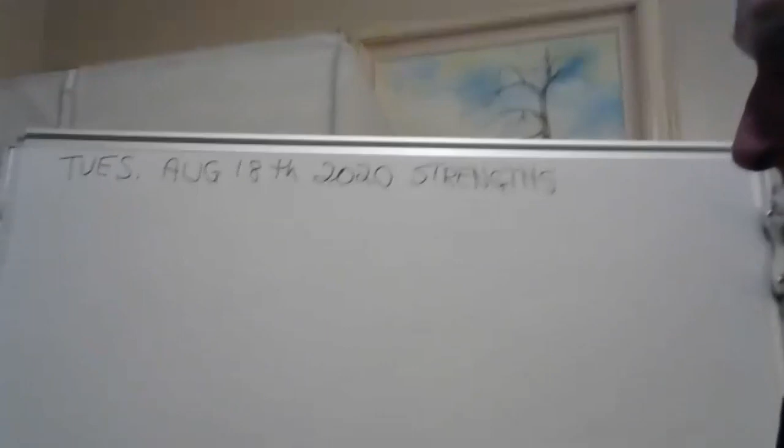Not too crazy about that camera angle. Hey, I think we've got somebody. Hey, there's Ben. There's another person. Let's see who we got here. We got Ben and Brian. Anybody else? I'm not too pleased with this. Hey, that's more like it. That's doable.

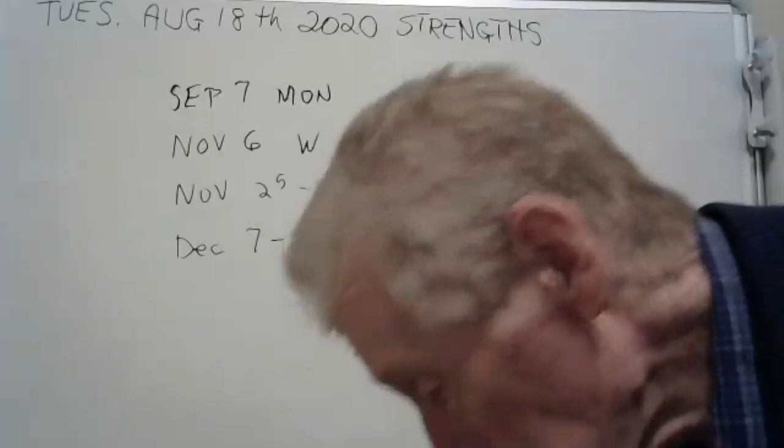Thanksgiving is November 25th through 29th. And finals are December 7th through 13th. You could look all that up in the calendar there under Blackboard. You didn't need me to do that. I just wanted to write some stuff on the board.

Okay, well, great. Well, so what? Well, I guess we could look at the syllabus a second. Let me see if there's anything important on that. I've got a copy here of the syllabus someplace.

Yeah, here it is. The book. Ta-da! That's the book, guys. It's by a guy named Hibbeler. It's the 10th edition. It tells about that in the syllabus.

Let's see what it says. I'm looking at the syllabus here, it's on Blackboard. And it says... oh gee, this is blank. This is the blank syllabus. I need the actual syllabus. Just a minute.

Okay, I think this is the real thing. No, that's another blank. All these are blank. I guess you're going to have to look it up on your Blackboard.

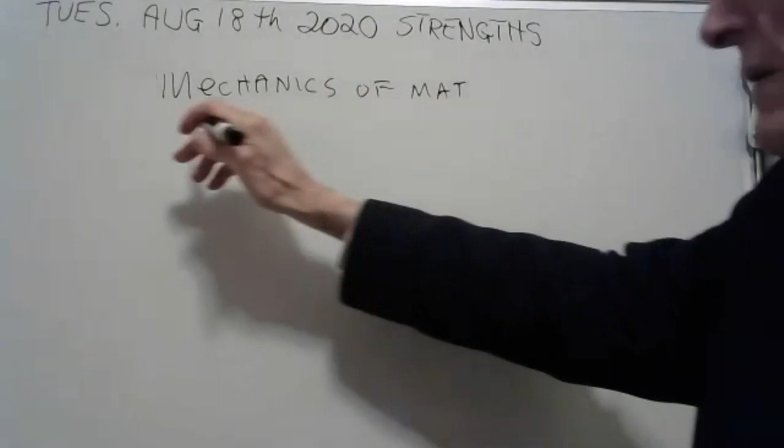The author is Hibbeler. The publisher is Pearson. And it's the 10th edition.

You can get that book through the TCC bookstore, through the publisher Pearson, or I bet through Amazon or Barnes and Noble. If I remember right, some places offer it as a rental. You can rent the book, it's real cheap. Just a thought, you could save money.

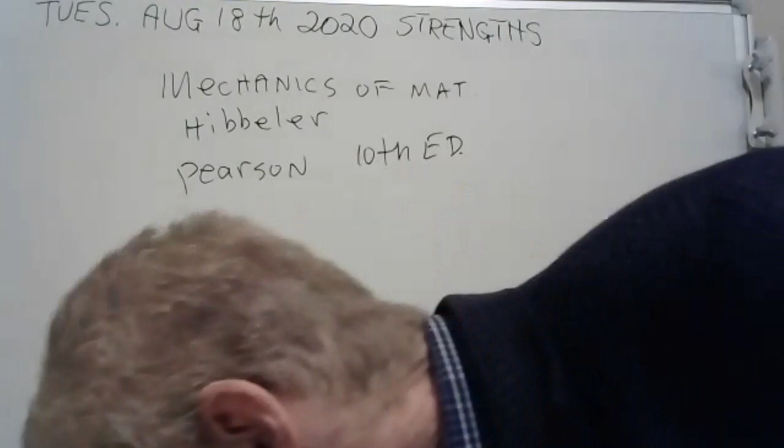You might be able to get the book also as an electronic book, that'll save you some money. So whether you get a new book, a used book, an electronic book, or rent the book, that's the book. I think on the syllabus it even has the ISBN number.

I could give it to you, but if it's on the syllabus you don't need it. I asked what that stood for, and somebody said it's the International Book Number. I think it's International Standard Book Number, I believe is what that stands for.

So that's the book. The syllabus tells you what the homework is, when it's due, and how to do the homework. And then the schedule tells you when the tests are and what homework is due.

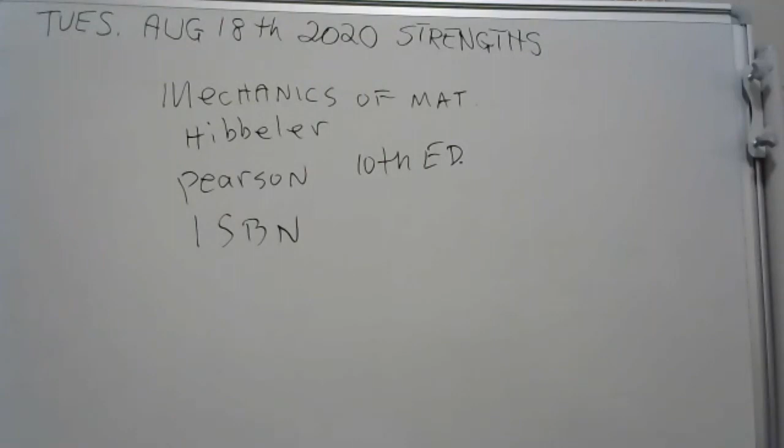Read them. Read the syllabus. Let's just write it down here: read the syllabus. And read the schedule.

Okay, any questions so far? Well, according to the schedule we're supposed to study chapter 1, so let's start studying it. And it says on the schedule that today, the 18th, we do a statics review.

So here, let's do a statics review. Here we go. Again, any last comments or questions before we start a statics review?

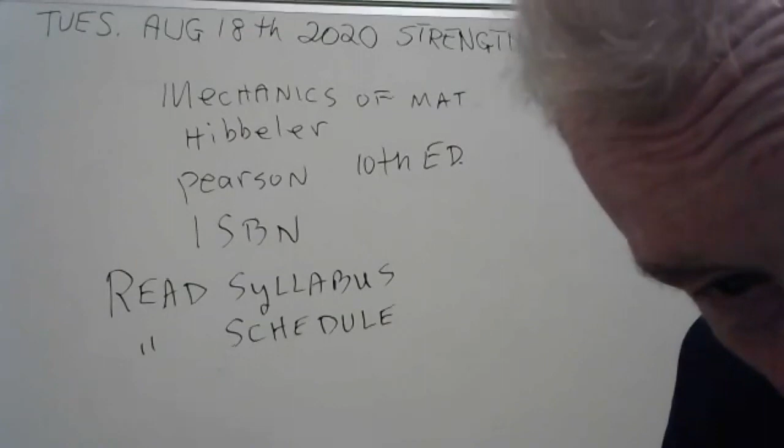Let me see who's on board here. Oh, we've got a good crowd. Look at this, we've got Alex and Nicholas, Julian, and Darren, Ben. I think some more here too. Let's see who else we have here. I don't know how to... there we go. We have Shane and Noah, Mohammed and Megan and Jackson and Hal. I remember some of you guys because I've had you before. And Damon and Brian, we got a great group.

Okay, any last comments or questions before we have a statics review? Now wait a minute, do I have everybody muted or what? Let me see, maybe I've got everybody muted. I don't know. It says unmute all, so I'll do that for right now. You're all unmuted. Anybody have anything to say? Anything to say?

Good morning. Hey, good morning. I heard that, how are you? I'm fine, thank you. Good, beautiful to be back in class. I didn't quite hear that last one. It's just good to be back in class. Yeah, isn't it great? It's good to be back. My audio is kind of weak, do you suppose there's a way I could turn up my volume? I don't know how to do that. Oh well, I can hear you.

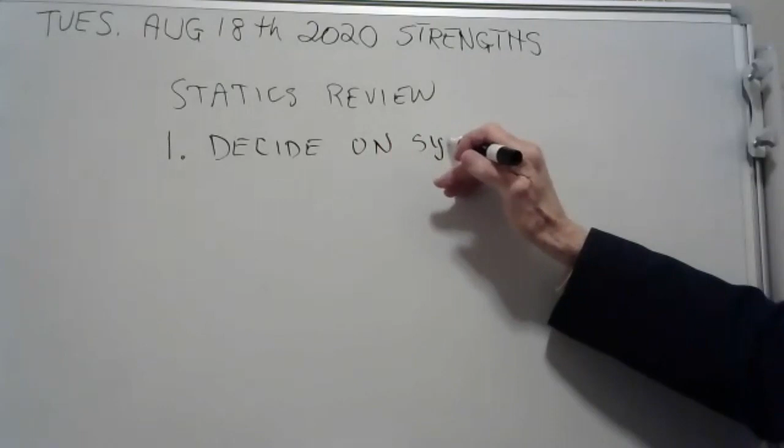All right, now I scribbled down some things here. When you solve a problem in this class, you have to decide on what your body is, or your system. You have to know what is part of the system you're studying and what isn't, and you don't want to get mixed up.

And then you want to make a sketch. You want to do a free body diagram, we call it. Let me write that out for you. They've called it that for years, it's kind of a weird name. But we'll do some free body diagrams, and then see what you do with that as you put your forces in there.

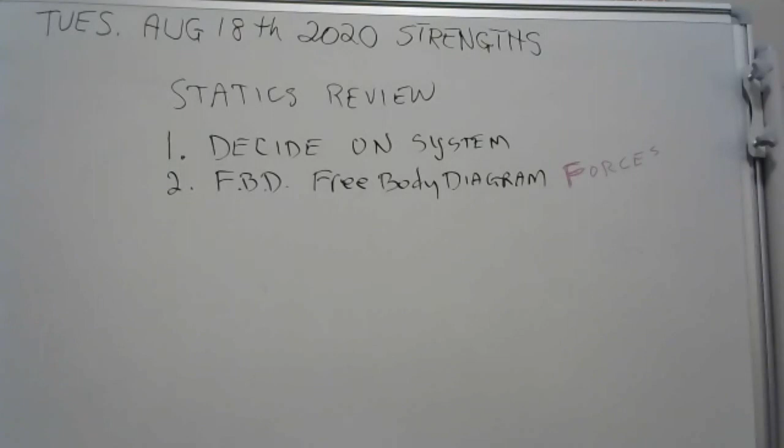Get yourself a red pencil or pen and put your forces in red. Does that come out red? Yeah, it kind of does. Put your forces in red. And where students can get mixed up is they'll put forces in, but they're not on the body, they're on maybe something else outside the body. That's why you have to decide what your body is. And when you do this, you want to do it to scale.

And you want to measure your angles. Measure stuff, see, get yourself a ruler. Ta-da! Get yourself a ruler so you can measure stuff. This has got metric and English. Get yourself a protractor. Ta-da! I got a protractor here. Measure your angles. Measure and do everything to scale. Okay.

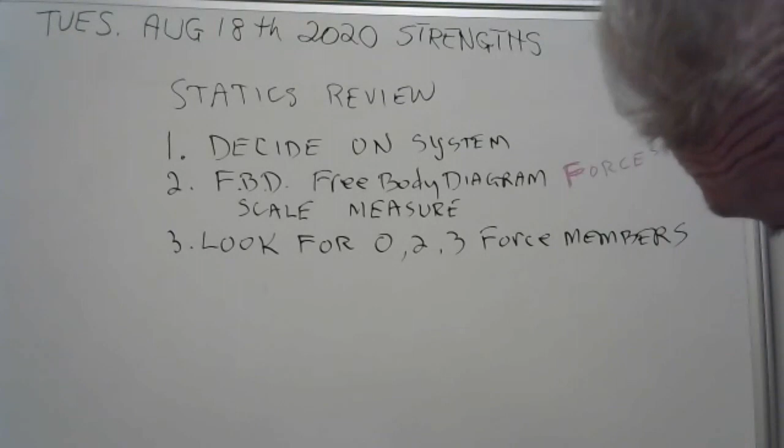And then the next thing you do is you look for zero, two, and three-force members. Maybe we can show you some examples of that later. Two-force members come in two types.

There's tension and compression. I'll draw you, if you have a tension member, I like my forces in red. Then it's being stretched, see, you have your forces going like this. That's a two-force member, it's only got two forces on it. Now if it's a compression member, then the forces are pushing like that. That's the two types of two-force members: tension and compression.

Hopefully I'm boring you because you already know all this stuff. This is compression.

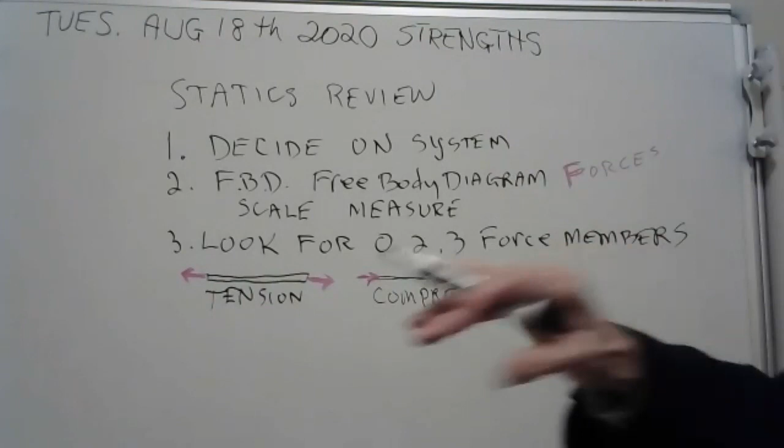Now, if you have a 0-force member, we'll show you one of those sometime. 3-force members come in 2 types: concurrent or parallel. Concurrent means that all of the forces go through a point. Parallel means that all the forces are parallel.

We'll show you an example of that. Okay, step number 4: you solve for all the external forces and moments. You might have moments, that's possible.

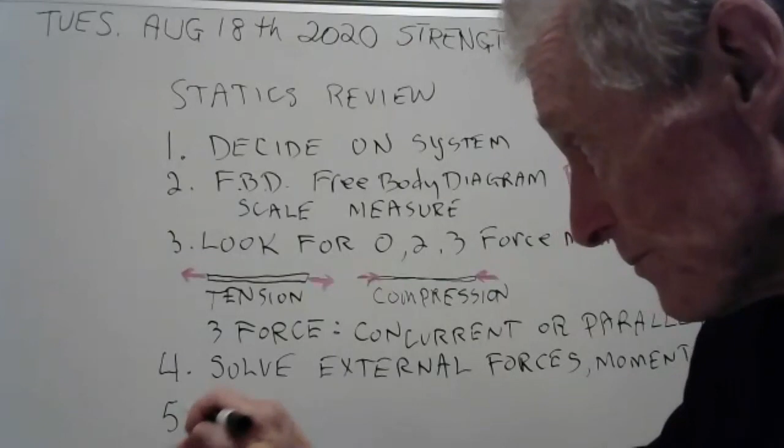Solve for them. And then step number 5, if they want you to find internal forces and moments, then you have to break it. By the way, you solve these using these equations right here. This is how you solve for the external forces and moments on your whole system now. We're just dealing with the whole system.

Well, I ran out of space, so I'm going to have to go to number 5 now. But here's a nice little checklist. Number 5: if they want you to find the internal forces and moments, we can call them internal loads. You could call these external loads. But to find the internal loads,

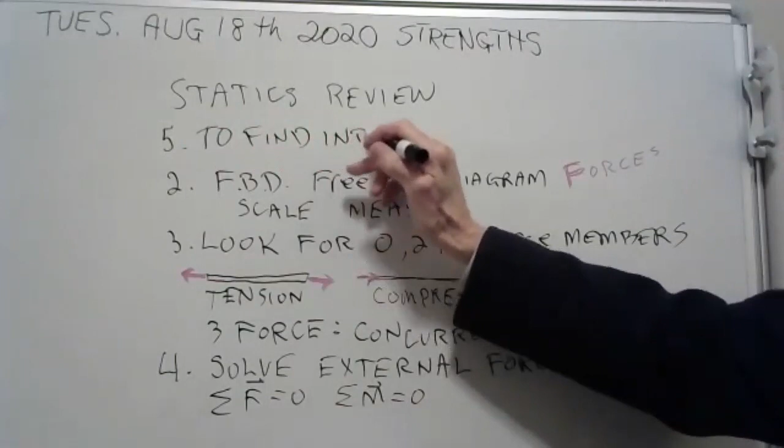you have to make sections. You're going to have to section this. And there's 3 ways to section a system. You can make pins, you can talk about pins, or you can talk about members. Pins, members, or sections, where you maybe cut the whole system in half or thirds or whatever.

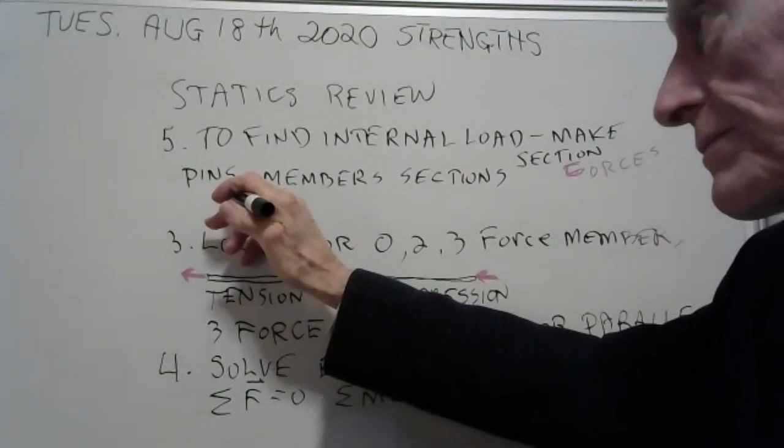And then once you decide on whether you're using pins, members, or sections, then guess what? To solve, you have to use these equations again, but you're going to use them this time on your chosen pins, members, or sections. You're going to do it on your parts. Instead of saying make a section, you have to break it into parts. If you want to find what's going on inside, if you want to find the internal loads, you have to break it into parts.

And then guess what you do after that? Well, I skipped something. Really, before you do that, you should look for 0, 2, and 3-force members on your parts that you broke it into. Then you solve for the forces that are acting and the moments that are acting on your parts.

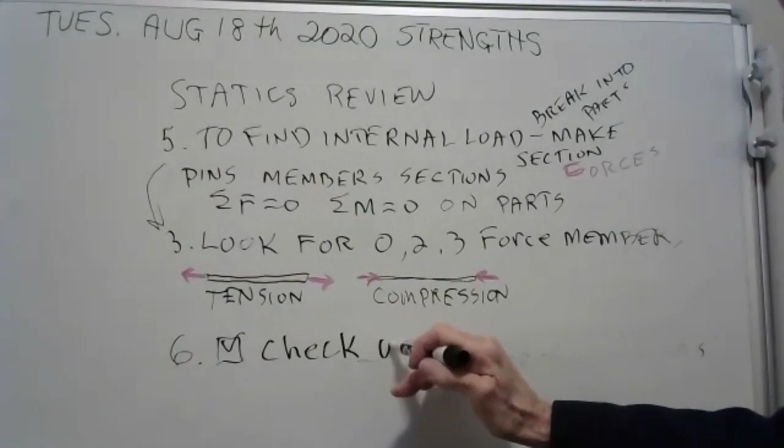Okay, and then finally, when you get all through with all that, the last step... I think we had step 5 there, maybe. The last step is you want to check your work. Now, there's several ways to do that, and I'll try to show you, and maybe you can remember how to do that.

One way is get a buddy and work with a friend, and the 2 of you together can find each other's mistakes that way. It's hard to find your own mistakes. Another way is you can look in the answer book if you're lucky enough to have one. Another way of checking your work is to look at the units. The units have to work. Check your work, check your answers, check your units.

There. Now we've just given you a statics review. Do you have any questions on the statics review?

Well, let me go back over to zero. Go ahead, get back over zero force members. Yeah, okay, I'll do a zero force member for you. Thank you for asking. Let me make a little room here.

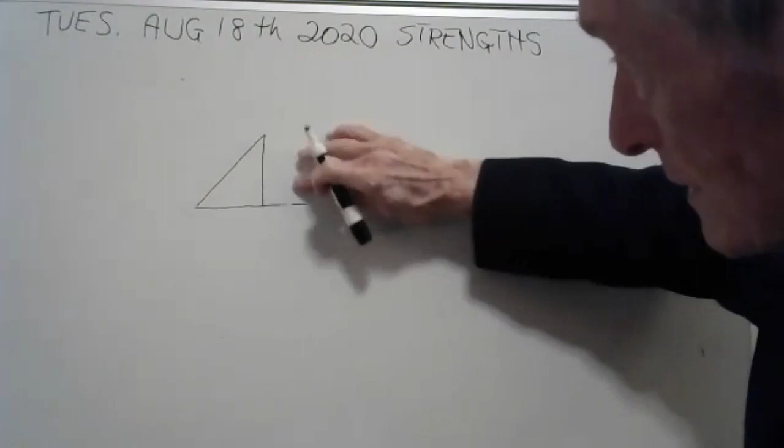Suppose you had a truss. And who am I talking to? Who asked me this question? Who is it? Jackson Wilson. Oh, Jackson. Good going, Jackson. Thank you for asking.

Jackson wants to know if you had a truss like that. Now you need some kind of external load. Why don't we put an external load right here, Jackson? There we go. Now you know there's got to be some external loading going on here. It kind of depends on the angles. I didn't draw those exactly equal, but it turns out, Jackson, that this member right in here is a zero force member.

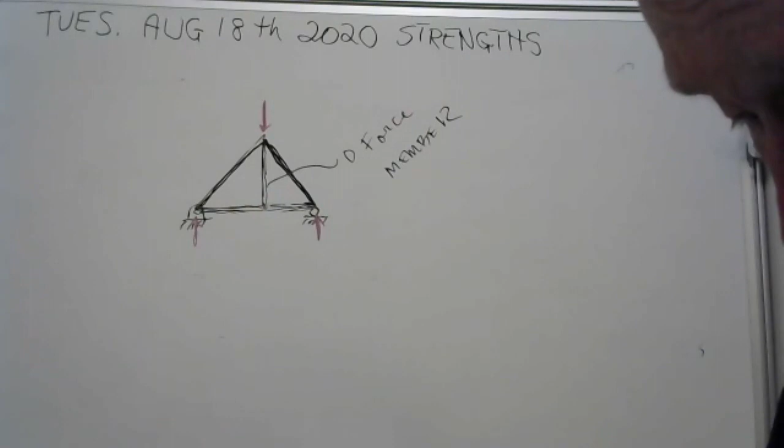Now the reason why is this is a truss, and trusses are composed entirely of two force members. That's what a truss is. It's a structure composed entirely, let me write that, a truss is composed entirely or only of two force members.

It's just that this one here, I don't know what to call it. Let's say this is A, B, C, D. BD is a two force member, but both forces are zero. You got zero, I don't know, kips maybe, and zero kips. It's not tension or compression. It's a two force member. It's just that both members are zero.

By the way, a kip is 1,000 pounds. I hope you know that. But if you don't, I'm glad you're tuned in, because that's what a kip is. It's a kilo pound. A kip is a kilo pound.

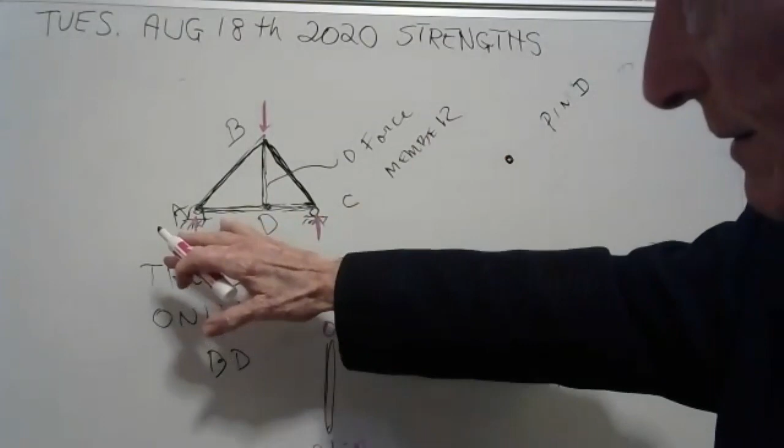Now here's the reason why. Do you see this pin D right here? This is pin D. We are looking at pin D. Well, it turns out that these bottom members are tension members. And so it has a tension member that's pulling on it, AD. There's AD. And it has a tension member, DC, pulling on it. And the other, they have to be equal. They have to be equal because that pin can't go anyplace.

Now, if this is a tension member, then that would be pulling on it. But you can't have just one force on that pin or it would move. In statics, nothing moves. That's what the word static means. It doesn't move. So there is no other force going down. I don't see any force going down here, do you? And so that force has to be zero.

That force has to be zero. And these forces here, these are not zero force members, but BD is a zero force member. Here, let me draw it for you. There's more room over here. Here's BD. Now we know that there's no force down here at D. Zero force at D. So you can't have a force at B. There's only two forces, and if that one's zero, then that one there has to be zero. Now there's forces all right in these members here. They're compressive forces.

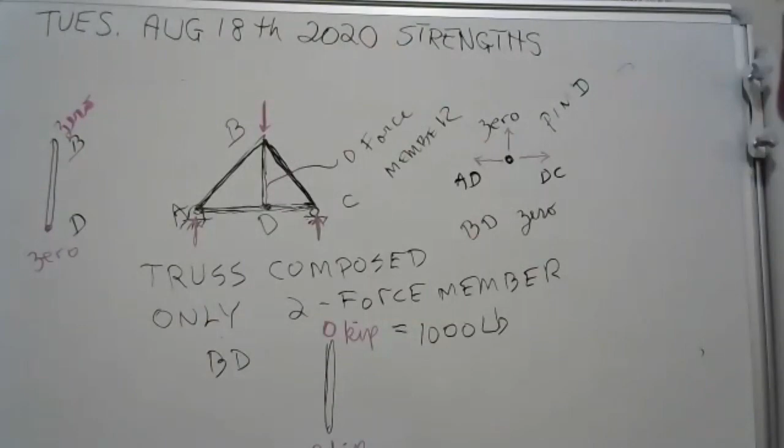Jackson, did I explain that where you understand it? Yeah. Are you saying yes just to be nice, or do you really understand it? Yeah, it's just been a while since I was last in statics, so. Good. Well, thank you for asking.

Now let's see, where was I? Oh yeah, I want to do a problem now. I want to do a problem to illustrate.

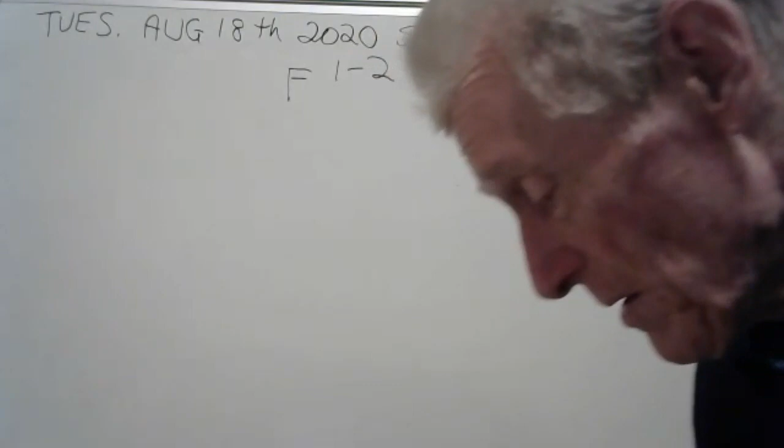I know you can. Okay, now the problem we're going to do together right now, I'm totally organized here, is it's on page 16. That's your homework. Well, this is on page 16 also. Let me find it here. Okay, this is F1-6. Okay, we're going to do this problem. That's your homework. Let me erase that. It's on Blackboard, but this is not on your homework. This is just for fun for us to do, to practice doing statics.

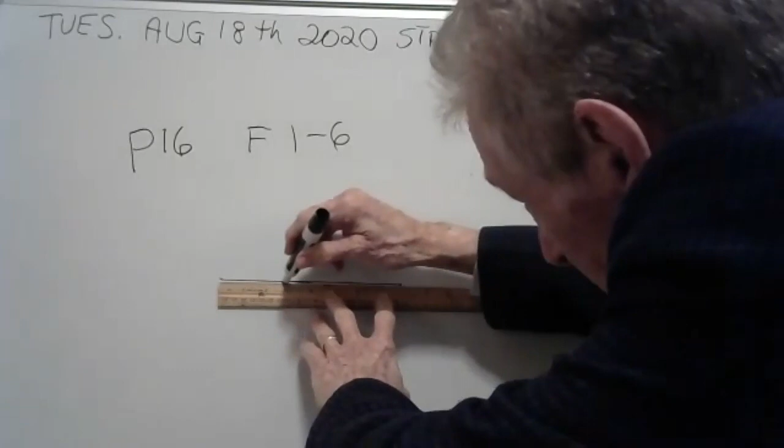And remember, I gave you step by step how to do statics problems. And the first thing you got to do is write your free body diagram to scale. So let me get my ruler out. And I need to have a 3, 4, 5 triangle here. I wonder if I could do inches. I don't see why not. Let's have inches. Yeah, guys, wouldn't it be better to have a scale of 8 inches though? Yeah, that's what we'll do. So we'll have that 8, and this will be 3. Well, that'd be 6. Yeah, there we go. Yeah, we're doing this to scale.

And then we got this here. Let me make some room here. This is problem F1-6 in your book. And how long is this thing? Well, it's 6. So that'd really be 12, wouldn't it? Man, I don't know. I don't know if I got enough room for all this. Yeah, we'll make it.

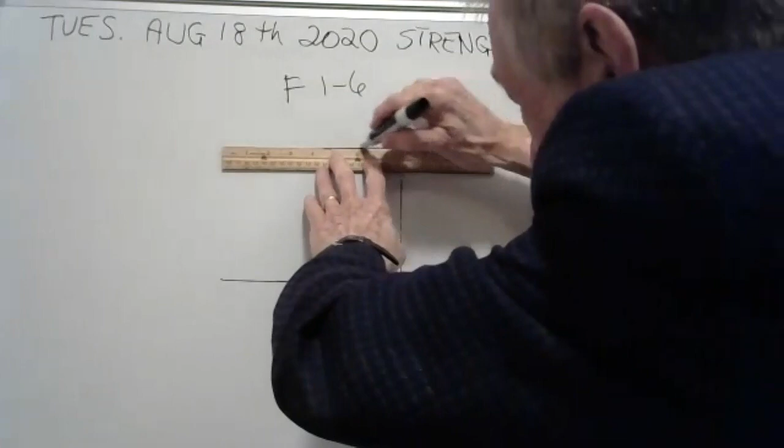I'm trying to do this to scale. How far is it now? It should be 8. Yeah. There we go.

All right, let me draw this thing here. I've tried to draw this thing to scale, this way I know how. And there's a distributed load on it. Now how big is this distributed load, is the question.

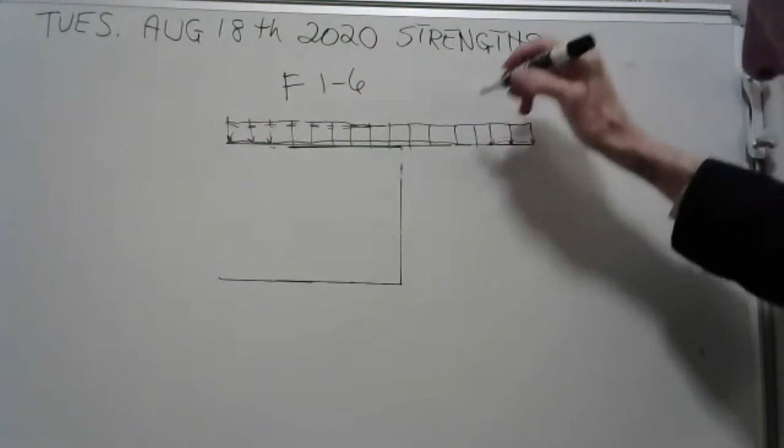Well, sorry, it's messy there. Yeah, it's 5 kilonewtons per meter. Okay, and now this, did I make that 8? Yes, did I make that 8? Yeah, pretty good, pretty good.

Yeah, let's try to draw this thing. It's a bent rod, you know it? It's a bent rod. Yeah, there we go.

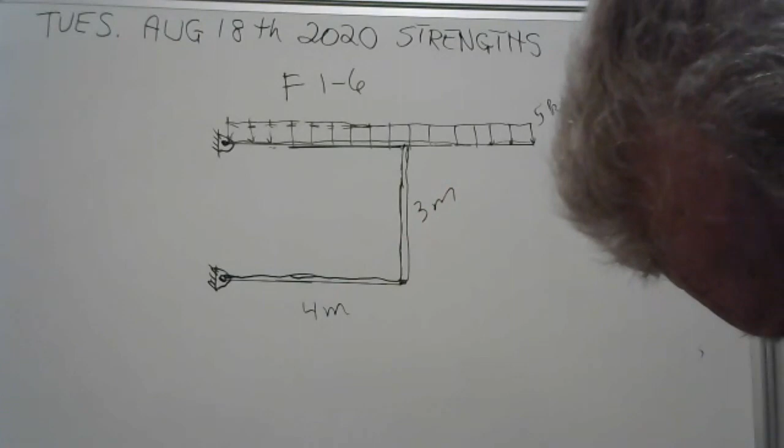This is 4 meters, 3 meters, and that's 6 meters across the top. So that makes that 4 meters, that makes that 2 meters, doesn't it?

Should be 4 inches on my scale. Wait a minute, I think I goofed up. If that's 4 meters, this should be 8. 4 meters 8, this should be 6. And this should be, well, it's supposed to be 12, right? Yeah, yeah, I made this too big.

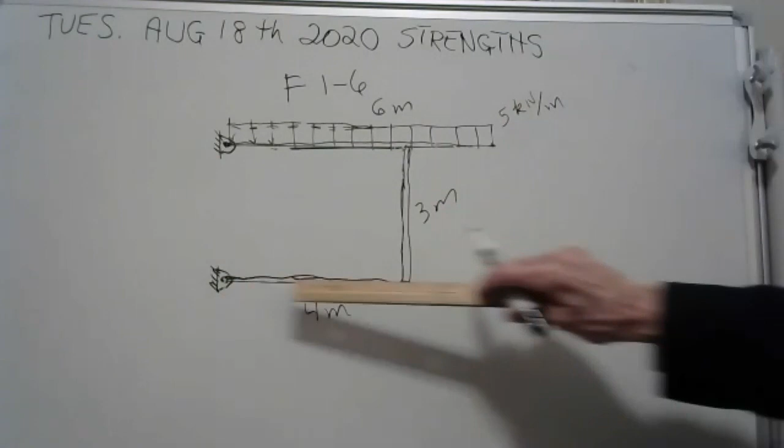That's okay, this should be 4, and it is. Now you're supposed to do your homework. If you read the syllabus, you're supposed to do your homework on engineering paper. And if you have engineering paper, it has a grid, and you can make these angles right, and you can measure these and get them to scale.

Look, I did this to scale. See, this is 4 meters, and this is 2 meters. I did it to scale, didn't I?

Okay, let's label all this stuff. This is A. Now, they want us, for some reason, to label a place in here called C. All right, we'll do that. And this is B. There's B. And this is D. There, we labeled all that stuff.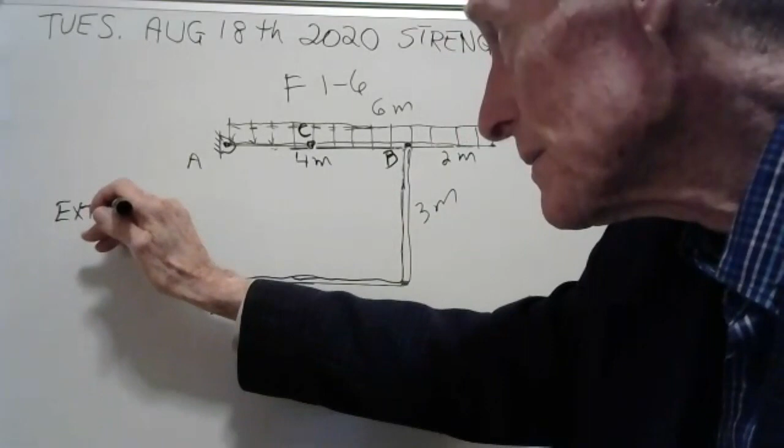Now, what do they want to know? They want to know the internal forces at C. You guys need to understand that there's external forces and there are internal forces.

And when we study stress, stress is always based on the internal forces. And we'll find the stress. Do they want to find the stress? No, all they want to find is the forces. But we'll soon be talking about stress.

You see, there's normal stress, and what that is is normal force over area. And there's shear stress, which is shear force over area. But normal force and shear force are internal forces.

Okay, well, now our first job is to figure out all the external forces. Okay, well, here goes. We are going to write this distributed load. What is it? 6 meters? 6 times 5 is 30. So we're going to put that right in the middle.

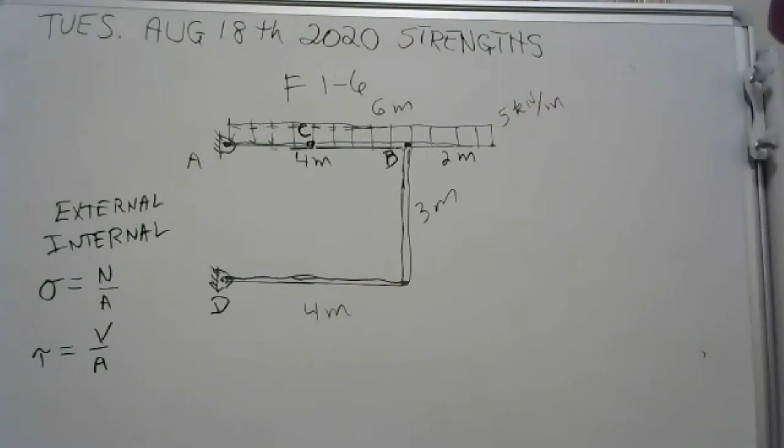Well, what's the middle of it? The very middle, according to my scale, would be right here. And this is the resultant force of that distributed load, and it's 6 times 5, it's 30 kilonewtons. That's your external force there.

And we need to find out what the forces are at A and D. That's what we need to find out. We don't know what they are.

But it did say to look for 0, 2, and 3 force members. Do you ever wonder why we don't look for 1 force members? Because you can't have a 1 force member in statics. Now, our course is called Strength of Materials, but it's still statics. If you have a body with only 1 force on it, that body is going to move, and it's not going to be in our course. We're still in statics, really.

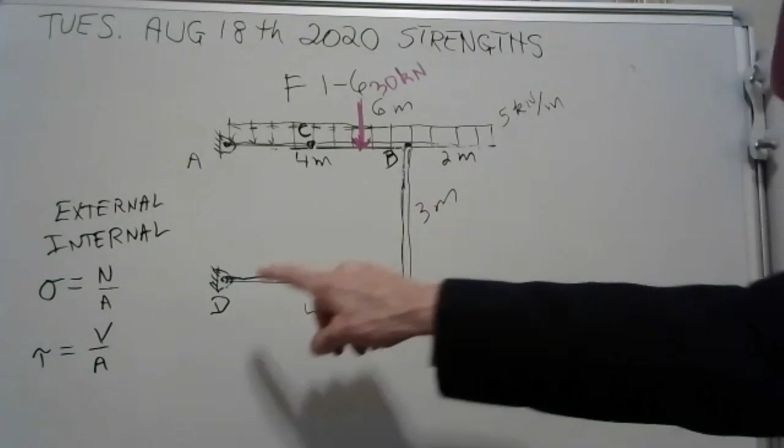But it turns out that this crooked member BD is a 2-force member. It may not look like a 2-force member, but I'll tell you what, it's only got a smooth pin at D and a smooth pin at B. So it's going to have a force that does this.

Because remember, there's only 2 kinds of 2-force members, compression and tension. And this one's going to be compression. I should make that red, though, I like my forces in red. Hey, we just found out the direction of this force at D. Let's call it D, would be a nice name for it.

Okay, great. Now, if you drew this bent member here, there would be a compressive force on it in line with that force at D.

Now let's look at A. Can you tell that at A, it's got to have a force going to the left, because this has a force going to the right, but it also might have a vertical force. I don't know. We don't know yet. It might have a force going up. We don't know the amount of this force D or either of those forces at A.

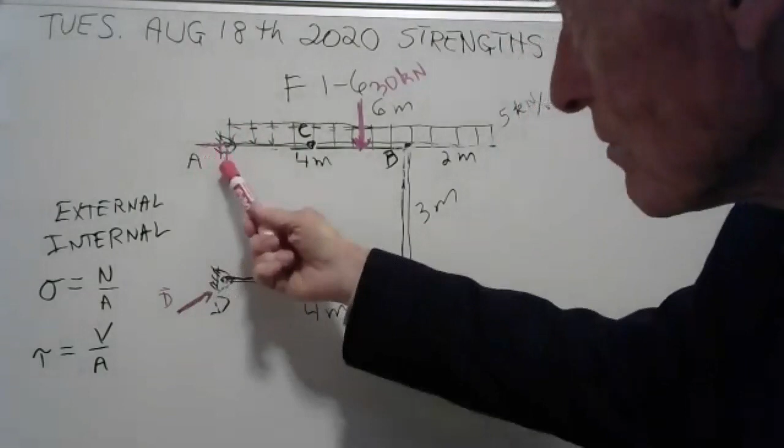We could give them names. We could call this AX, and we could call that AY. That'd be okay.

If anybody just tuned in, what we're doing is reviewing some statics. We're doing problem F1-6, on page 16 in your book. We've tried to draw the free body diagram to scale. You're supposed to do it on engineering paper. And the syllabus says to write out the problem exactly as it's expressed in the book. They say, determine the resultant internal normal force, shear force, and bending moment at point C in the beam. Well, we'll do that.

And we'll follow the step-by-step methods of statics that I tried to show you earlier. And we will put this on YouTube. You could watch this over again if you didn't get it the first time.

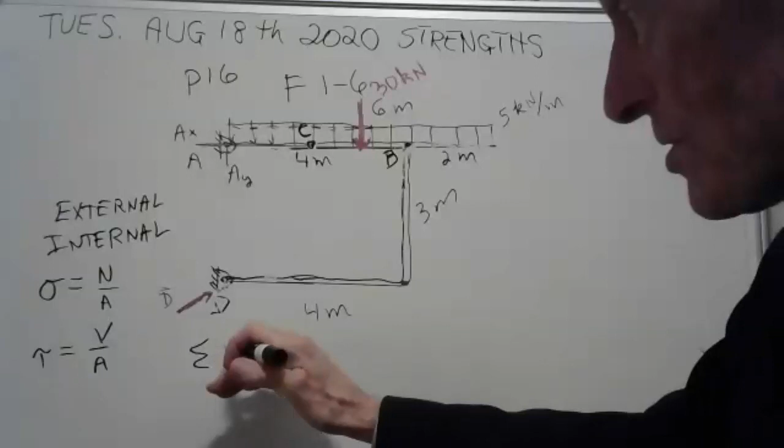But now how do you find these external forces? Well, according to our step-by-step method, you use these equations. You go the sum of the forces and the sum of the moments. Let's do the sum of the moments, and you have to pick a point. Always pick the point where you know the least. I don't know what either of those are, so I'm just going to say the sum of the moments about point A.

It's going to be negative 30 kilonewtons times, I'm going to have to think about this. I think it's 6 meters from here to here. See, it's 4 meters from here to here, but no, wait a minute. No, that would be 3 meters, wouldn't it? Yeah. See, on my scale, that's 6 inches, so that's 3 meters.

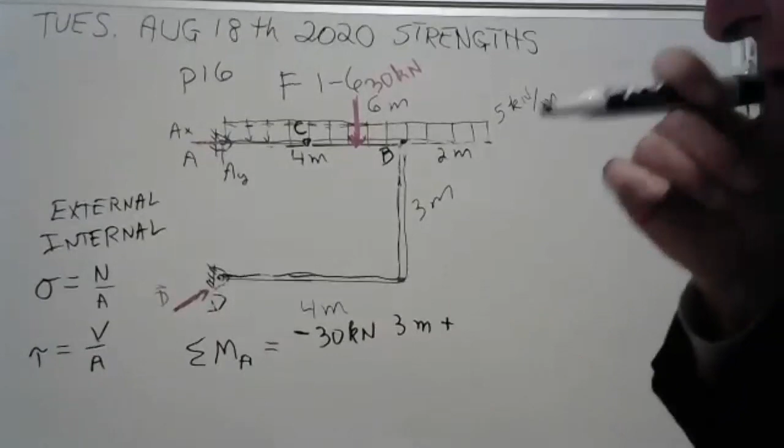Okay, and then you have a positive. Well, that has components, that's the problem. Let me draw the components. At D, you have a dy going up and a dx, that's the component in the x going to the right. So you have a positive dx times this 3 meters. And that's equal to 0 because the sum of the moments has to be 0 in statics.

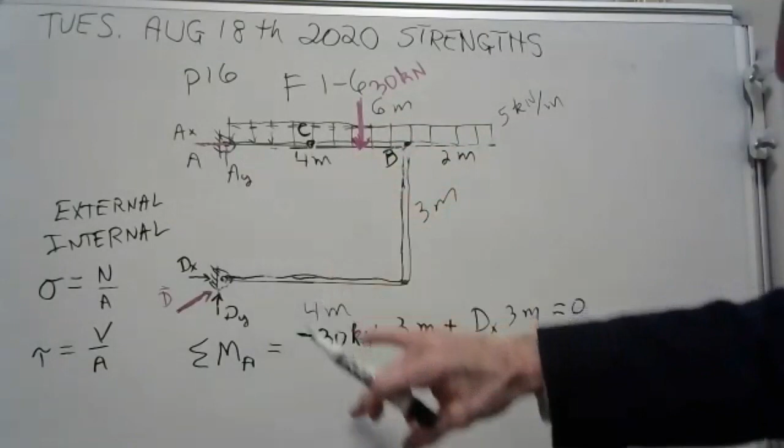I want to know how come that's a minus though. Let me ask one of my wonderful students here, see if they know. We have a lot of wonderful students here, and I'm going to pick on Shane. If you can unmute Shane and tell me how come this moment here, this 30 kilonewtons going down at 3 meters across is negative. Shane, how come that's negative? Unmute. Shane's not going to tell me. I'm going to unmute all. Somebody tell me, how come that's negative?

Because it's going clockwise in that direction. Positive, because of what? It's clockwise in relation to the point. That's the answer. See, about this point A, this would make you spin clockwise. Clockwise is negative, counterclockwise is positive. That's how come this one's positive. Because this dx tries to spin you counterclockwise about point A.

I actually have a question about that second member. Yeah, go ahead. Why is it dx instead of dy? Well, the x direction is this way, and the y direction is this way. And what I'm saying, tell me your name. Darren. What I'm saying, Darren, is that this force D here has an x component going to the right, a y component going up. And what is your question, Darren?

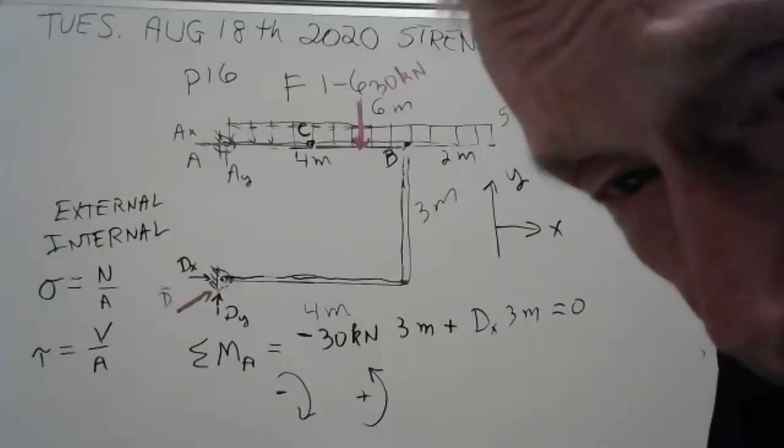I didn't understand the question. Why is it the x component of the force at D instead of the y component of the force at D? Oh, thank you for asking, Darren. This y component goes through point A. Can you see that, Darren? And a force that goes through the point doesn't give a moment. That's right, I'm sorry, it's been a while since I've had statics.

That's why we're doing this. Good question. Okay, well, I like this equation. I can solve this. In fact, I should be able to do that in my head. I'm getting 30. You guys getting 30? We just figured out this dx, it's 30 kilonewtons.

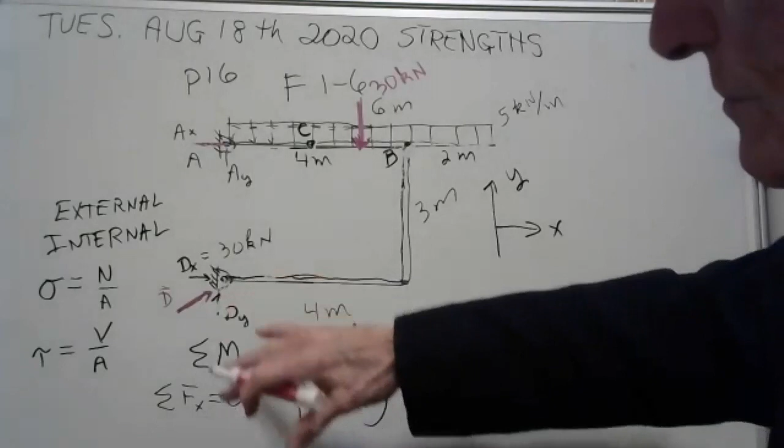Now we're going to do this equation here. The sum of the forces in the x has got to be 0. Well, there's only two forces here in the x. You've got 30 going to the right, so this 30 here is going to the left. I really like my external forces in red, so I'm going to put these components in black.

But what we have here is the x component is 30 kilonewtons. Isn't that nice? So now we know that, because the sum of the forces has to be 0. There's only two forces, one going to the right, one going to the left. They're both 30. And now we can get this force dy.

See what we're doing right now is we are getting the external forces on our structure. I need this dy. Okay, well, let me do that. I need to make a little room here.

Now, the sum of the forces in the y, we know has to be 0. This is one of the equations of equilibrium. There are two conditions for equilibrium. There's that one, and there's that one.

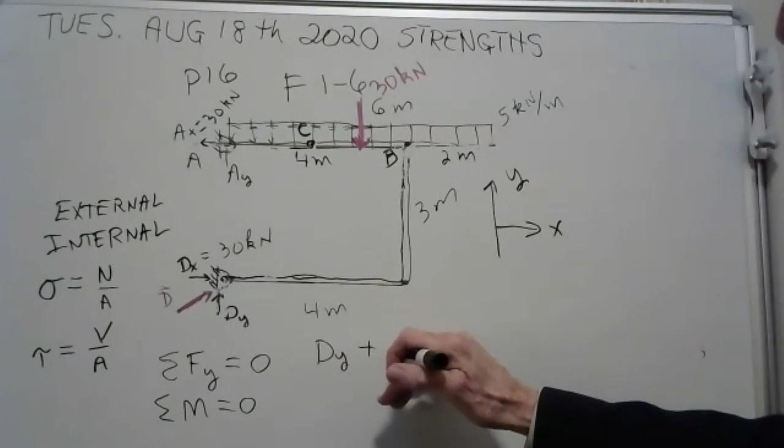Okay, well, let's do the forces in the y. Well, in the y, we have dy, and we have ay. Now, wait a minute. I don't know what ay is, do I? Well, never mind.

Okay, I don't know what ay is. Well, let me show you this. We know this angle here. This is a 3, 4, 5 triangle. If you drew this, that would be 5 meters. It's a 3, 4, 5 triangle. And if you take the arctangent of, now it'd be the arc sine of 3 over 5, you'll get 36.87.

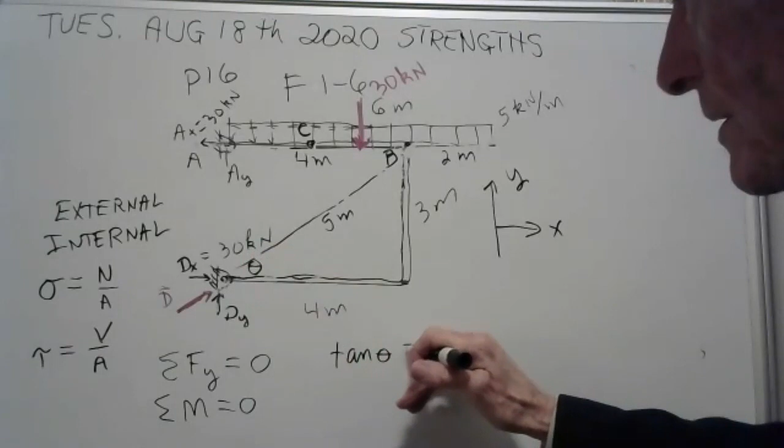I'm getting rusty now. Here, let me just do it on my calculator. What I'm doing is, or you could use a tangent. Call this angle theta. That angle theta is equal to 3 over 4, it's the opposite over the adjacent. Now, if you do that, what you get, this angle here is 36.87.

So what do we know? We know dx is 30. So d cosine of 36.87 is 30. And we can get d. And then we can get dy, and that'll be very helpful.

Did I lose anybody on that? Gosh, this is coming out underneath the board here. I need to write this up higher, sorry. Let me write it over here. D cosine of 36.87 is 30. Okay.

Well, we can solve for the d then. Here goes. D would be 30 divided by that. Okay, I can do that. I'm getting 37.5 kilonewtons. We just figured out what D is. D is 37.5

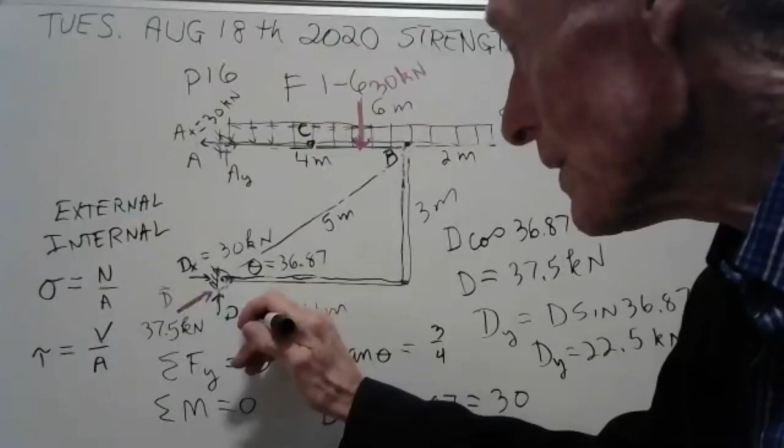kilonewtons. We think that this dy is 22. Unless I made a mistake, and if I have, I need you guys to tell me, but I think that dy is 22.5.

Now we can take the sum of the forces on the whole body. Here we go. I need some room here. Sum of the forces on the whole body are dy, which is 22.5, ay, which we don't know, and minus 30 kilonewtons. There's only three forces in the vertical, we're doing the y direction here. We got 22.5 going up, ay going up, and 30 going down. So we're going to solve for ay.

Well, I can almost do that in my head. Is it 7.5? Yeah. Okay, we think ay is 7.5 kilonewtons.

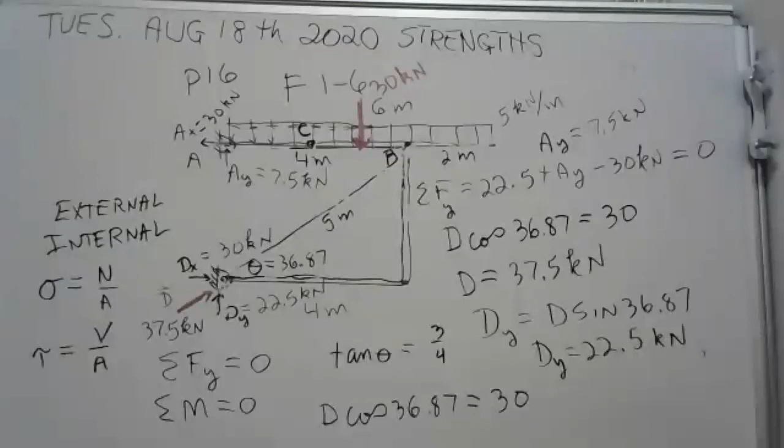I'll draw you a little angle here. You got, what I'm doing, I'm checking before I break it into parts. I've got 30 kilonewtons going to the left here at A, Point A. And I have 7.5 kilonewtons going up.

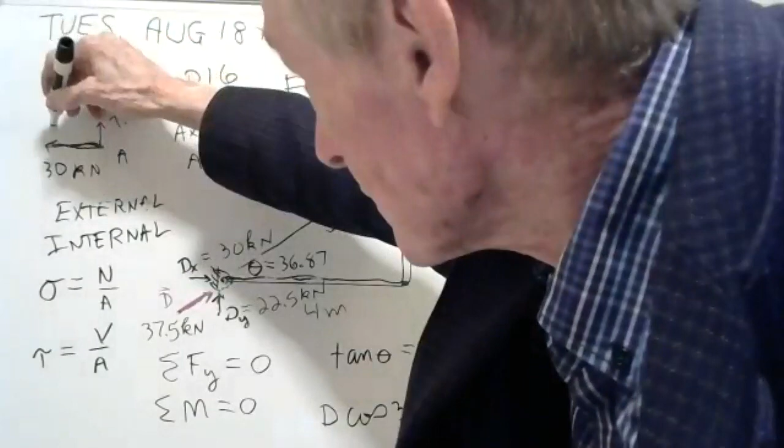So I can draw you that angle there. If you take the arc tangent of 7.5 over 30, I'm checking my work here. I'm making sure this is right. I hate it when I give you guys the wrong stuff. I'm getting 14 degrees. This vector at A is at 14 degrees, if I did that right.

Okay. Well, let's draw it. I'm going to make a 14-degree right here. Yeah, there's my protractor. 14 degrees is right, little bit messy there. Yeah, okay. 14 degrees, this puts me right about there.

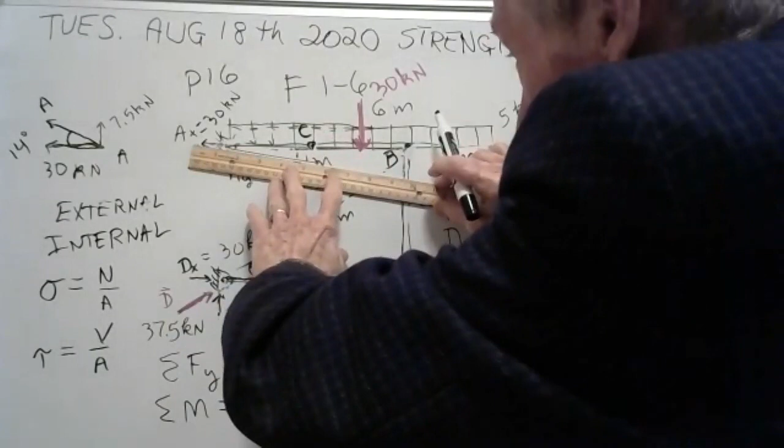14 puts me there. You see that 14 degrees? That's what we're talking about. There's 14 degrees there at A.

I don't really like it because all these are supposed to be concurrent. This angle is supposed to go, they're supposed to meet. They don't. So I must have made a mistake someplace. Let me go back over stuff here and see if I've fouled up.

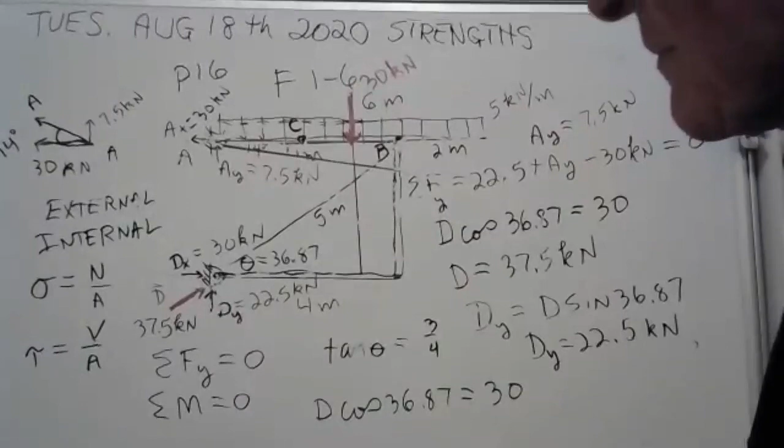I think I got this angle okay. Yeah, I think that's all right. That angle's okay. Yeah, I think I drew it kind of crudely there. Yeah, that's looking a little better. See, these are all supposed to meet. Is that 14 degrees? Let me double check that.

No, that's more like about 12 or 13. It's a little bit more than that. You know, I'm beginning to think we got this right, guys. It's a tad more than that.

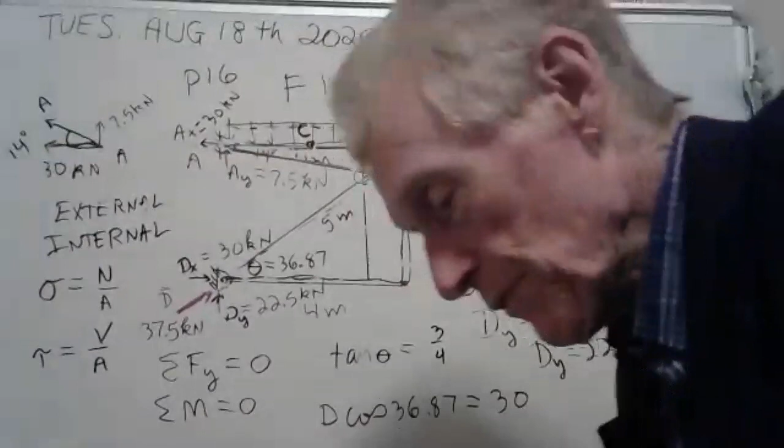See, these angles are all supposed to meet in a point. If you have a three-force structure, all the forces have to meet in a point. I should make that vector at A in red. It's more like this. There's A.

And I can tell you how big it is. It's 7.5 squared. Does that show up? Not very good. How about over here? Yeah. A is 7.5 squared plus 30 squared, square root. Let me try that and see what that is. 7.5 squared plus 30 squared, square root. It's 30.92 kilonewtons.

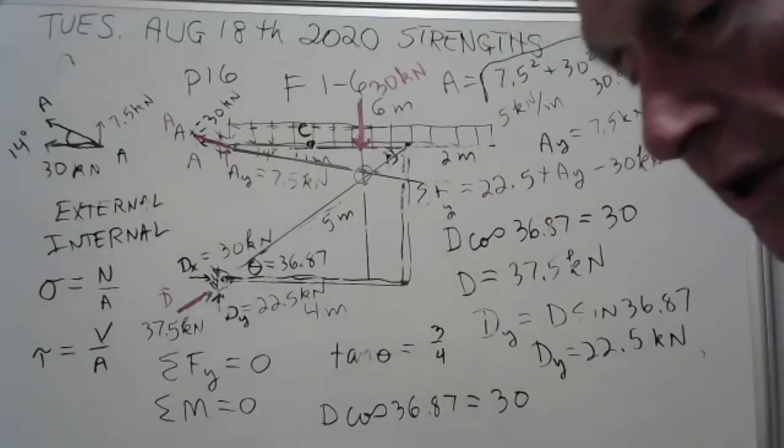Pretty dang close, guys. Well, let's solve this and see how we did. This is how you do these problems. Now, it's possible I might have put in a wrong number someplace. That's why I need you guys to double check this stuff.

But in order to find out what's happening at C, you have to take a section. So let's see if I can draw that. Do I have room here? Let's try this. This is really a hard problem. I shouldn't have picked this one. I should have picked an easier one, huh?

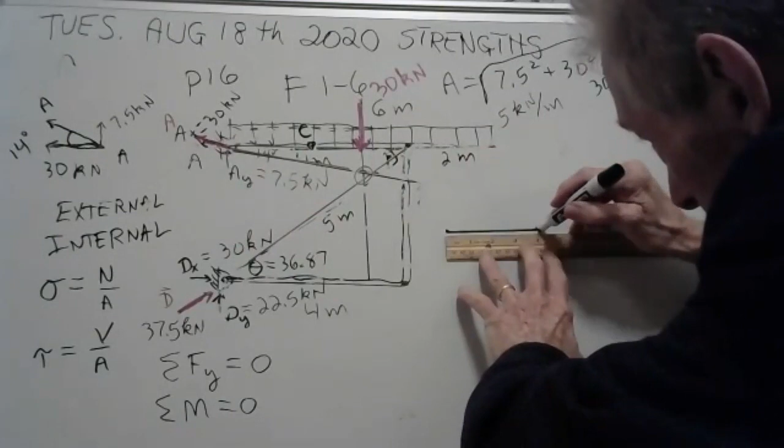But what we got here is, now how long is that? Well, that's 2 meters, right? So that's 4 inches on my scale. Now here's the thing, if you guys do this, get sharp pencils and have graph paper, you can get it to come out right on the money. It won't be crude like mine is, but I'm doing the best I know how.

This is C right here, and this is A. And if I did that A right, that's 30.92 at 14 degrees. So I can put that on here. Let me do that. Let's see. 14 degrees. It's a little bit crude. Yeah, it's right about there, I think.

And here's there's A. Now we're looking at this section here, and you have a partial distributed load here. This is 2 meters. This is 5 kilonewtons per meter. So that makes that 10. So you have 10 kilonewtons there, and A should be in red.

A is 30.92 kilonewtons. I need to make this 10 much smaller. You know, 10 is smaller than 30.92.

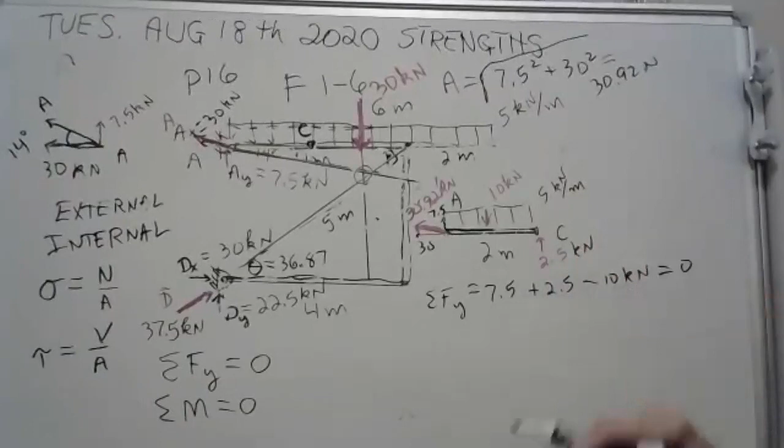7.5 going up, 30 going to the left. So when you take the sum of the forces in the Y on this section, you got 7.5 going up, 10 going down. You know what? I think you have to have 2.5. 7.5 going up, 2.5 kilonewtons going up, minus 10 kilonewtons going down equals 0. We've just figured out the shear force.

There are 4 kinds of internal loads. Let me write them for you. How are we doing on time? We're doing okay.

I wonder if any of you guys know what those are. We got a wonderful class here, and you've all had statics. Let me ask one of you guys. How about Samuel? Samuel, do you remember any of the 4 different kinds of internal loads?

The normal. Yeah, good going, Samuel. The normal, the shear force, and the moment. Very good, the normal force. Samuel knows the shear force. Samuel, they call it the bending moment. Okay.

And there's one more, Samuel. What's the last one? I don't remember that one. That's fine, that's fine. It's called torque. Proud of you. Thanks.

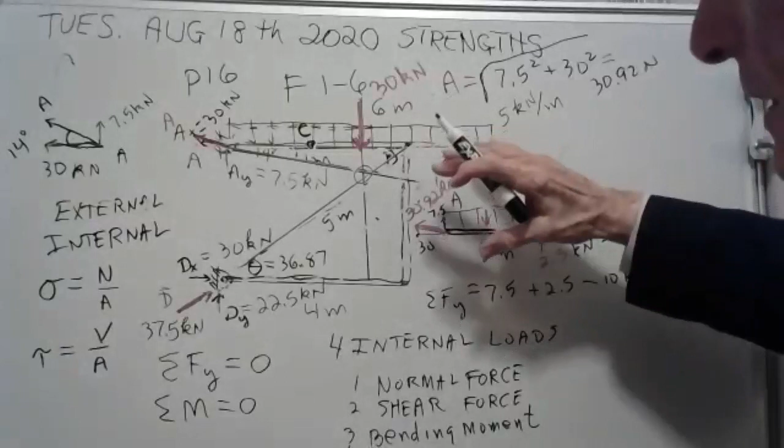There is no torque, so you guys can forget about torque. Torque, I don't know, torque is when you twist, okay? There's nothing twisting any of these members, so we don't have any torque to worry about.

And we just figured out the shear force. It's 2.5 kilonewtons. Now it's going up.

We figured that out, and now for the normal force. Well, can you see that if you got 30 going to the left, then you have to have 30 kilonewtons going to the right. Sum of the forces is 0 on this. So the normal force is 30 kilonewtons. It's tension, it's under tension.

Now, we haven't done the bending moment yet, but I'm just curious. Let's look at the answer book and see how we're doing on the answers. Guys, what we have just done is problem F1-6. This is a fundamental problem, and the beauty is they do these for you. Isn't that nice? So we could just look back here and see how to do it. Let me see if I can find it. F1-6, here we go.

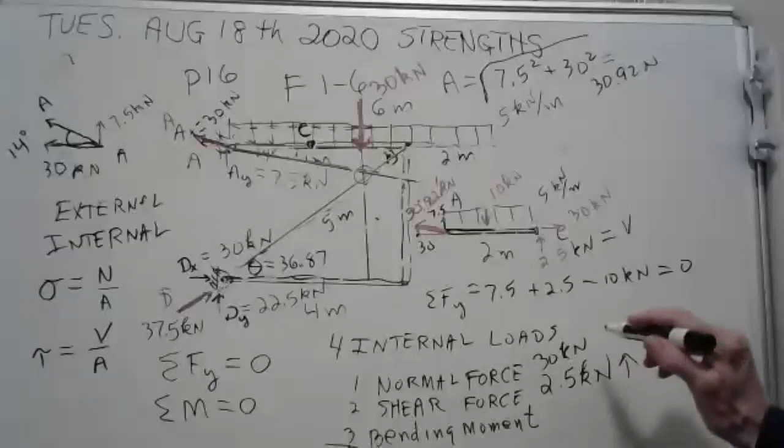Trying to find it. There's an answer book in the back, and it says F1-6. It says the normal force is 30 kilonewtons. Yay! Put a little happy face on that. We got the normal force at C. We did good. Now it says the shear force, got lost there.

The shear force, now they say that the shear force is -2.5 kilonewtons. Now we got, hey, I'm going to put a happy face on that too. We got 2.5 kilonewtons. But now wait a minute, they say it's negative. Well, you need to understand something.

I need a little room to show this. Let me write it over here. They made an agreement that if shear is going down on a left-hand member, it's considered positive. This is called positive shear.

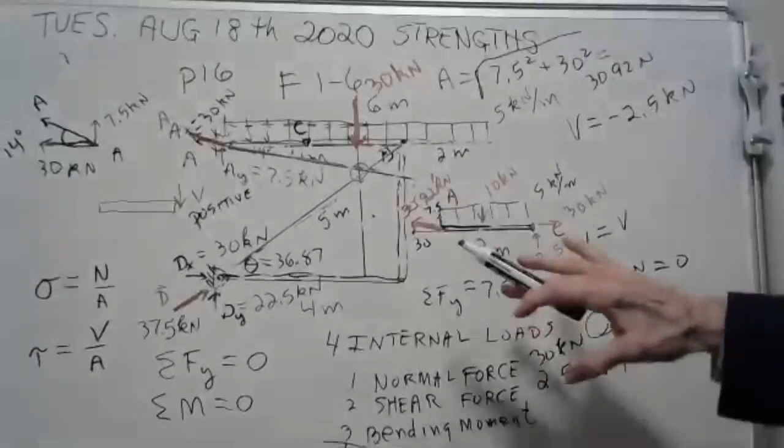But see, our shear, look, our shear is going up. See it? So that's how come the answer book says the shear is negative. Yay, we got it right.

Now the reason we got it right is we followed step by step. We drew the free body diagram to scale. We measured our angles. We did our equations of equilibrium. And we did not screw up, I don't think. Now, here's the final check.

We're going to do the bending moment. See, we're checking our work now. Well, we haven't got the bending moment yet.

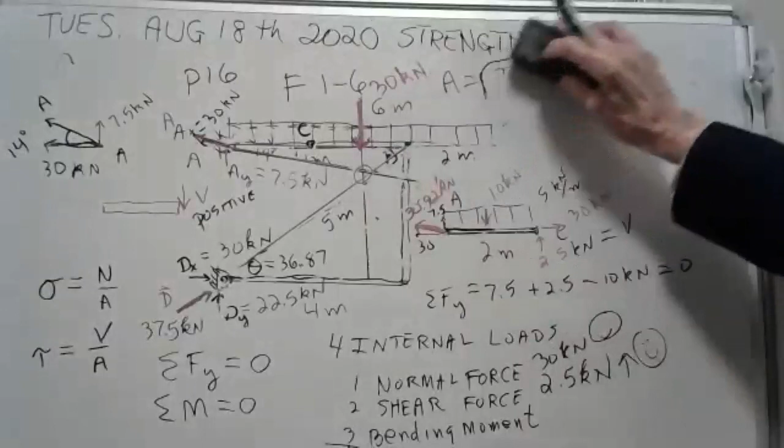Well, here's the equation. It's kind of in the bottom of the page there. I need some room. There's a bunch of room up here, let's use this. We all know this is August the 18th of 2020. We don't need any of that jazz. We know it's problem F1-6.

Now what we're going to do is we're going to take the sum of the moments, but we're going to do it on our section, see? This is our little section here, there it is. And why don't we do it about this point here? That is point A. Okay, hey, look, you see that 30.92 that has the components? That doesn't give you a moment about A. That force right there does not give you a moment about A.

Say that again, Noah. Or it's in the, let's see, hold on. This force right here, Noah, that goes through point A does not give you a moment about point A. Why is that? Because it goes through the force point. That's it. Yeah, it goes through the point.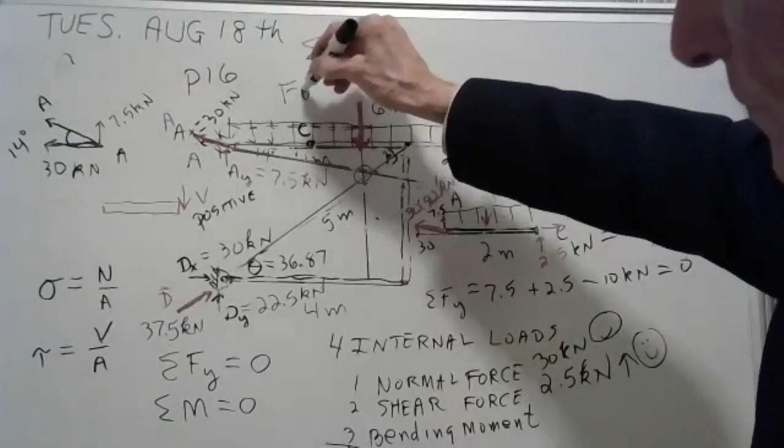Let me write that down. A force that goes through, how do you spell through? There you go. A force that goes through a point gives you 0 moment about the point. I know you know that, but see, I believe in repeating stuff until it sinks in.

Well, that doesn't give you any moment, but I tell you what, the 10 does. And that's going to be negative 10 kilonewtons times 1 meter, and it's negative. One of my wonderful students told me why that was negative, and I forgot who it was. Was that Shane that told me how come this 10 kilonewtons gives you a negative moment about A? Unmute, Shane, and tell me how come this 10 kilonewtons gives you a negative moment? Why is that?

He's not going to tell me. Shane, unmute. He took a coffee break. Okay, well, let's go to my friend Megan.

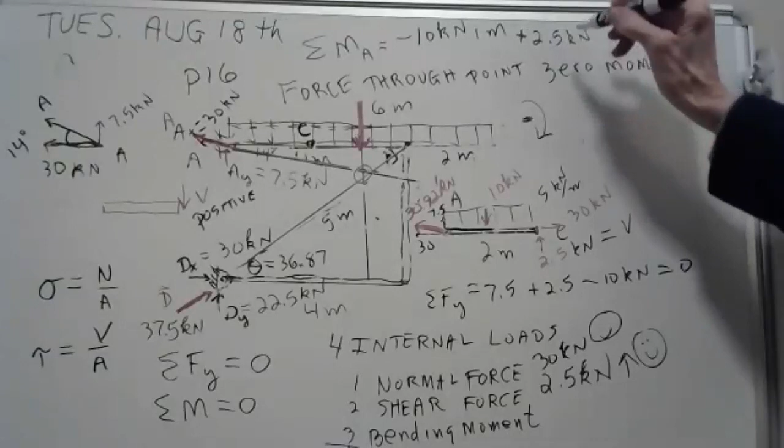All right, let's see what else we got. You see that 30? That doesn't give you a moment because it goes through the point. Any force that goes through a point gives you a 0 moment. But the 2.5 does, and that's going to be a plus, 2.5 kilonewtons times 2 meters. But we're not done yet.

I didn't put the bending moment in there. See, here's the bending moment, we'll call that M. How's that? Now, the reason this is a plus moment is it's counterclockwise. See that 2.5 at 2 meters? That's counterclockwise. And then you have the bending moment equal to 0, and now we're going to solve this and get our bending moment.

Okay, here goes. I could almost do that in my head. I'm getting 5 kilonewton meters. If you put a 5 there, does this all add up to 0? Yeah. Okay, here's the answer, guys. We think the bending moment is 5 kilonewton meters.

Let's see how we did now. We're going to go to our answer book, go to the back and find F, whatever this was, 1.6? Yeah, F1.6. Guys, we're doing F. If you just tuned in, we just worked on this for an hour. Fundamental problem 1.6, it's on page 16.

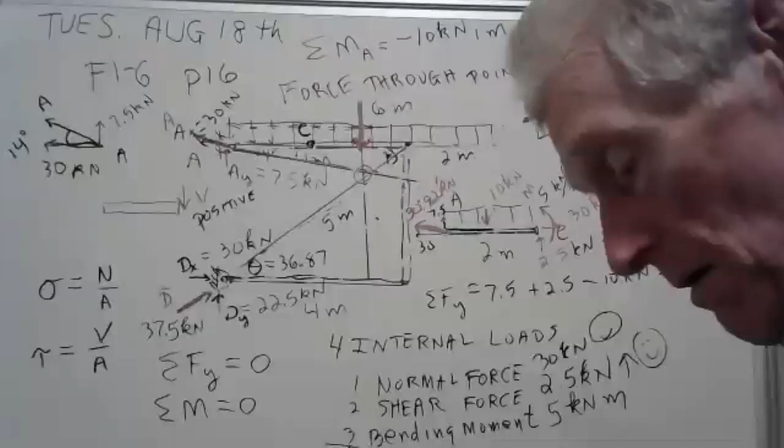And I'll answer any questions now. I'm listening. Did you have any questions on that? Okay, well, I guess you don't. So what's next? Let me think here.

Anybody have a comment or question? I have a question. Could you go over which are the conventions for the internal forces, like the shear, normal, and moment, to when are they positive and when are they negative? Thank you for asking. Now tell me your name. Samuel? Thank you, Samuel.

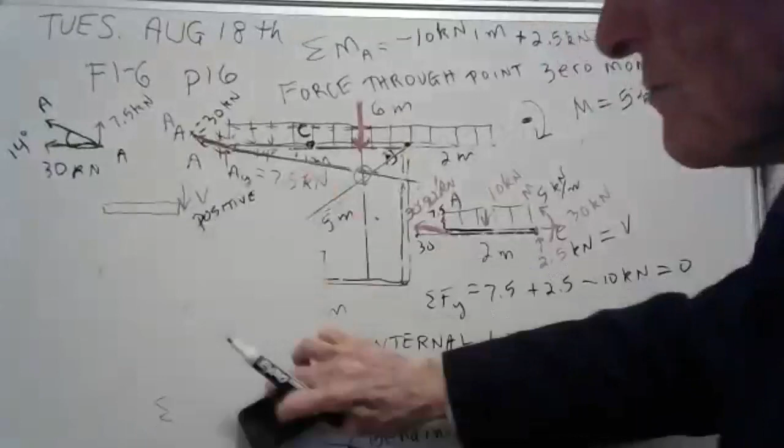We've gone over the shear conventions, the plus and the minus for the shear. For normal, let me make a little room here. For normal, tension is positive, compression is negative.

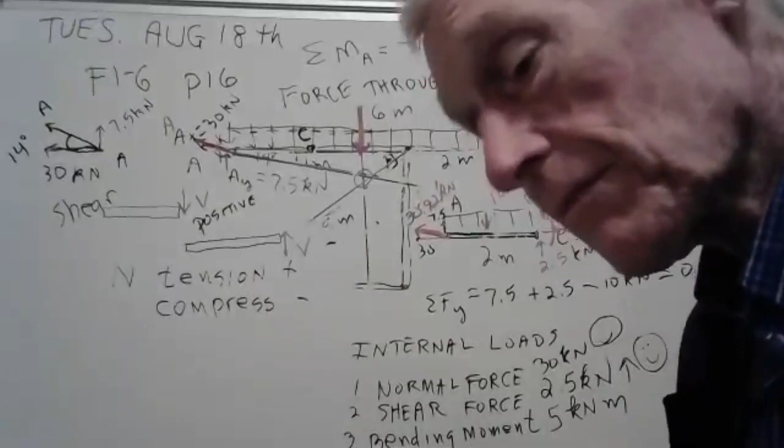For shear, shear going down on the left-hand member is positive. Shear going up, as in our problem we just did, if the shear is going up, then it's negative. Positive shear is down on the left-hand member. Negative shear, according to the convention, really a definition, is shear considered negative if it's going up on the left-hand member.

Now, when it comes to torque, well, let's do bending moment first. We've done bending moment. If you have a member like this, a left-hand member, and the bending moment is counterclockwise, yeah, that's counterclockwise, that's considered positive. If it's going the other way, if it's clockwise, the bending moment's clockwise.

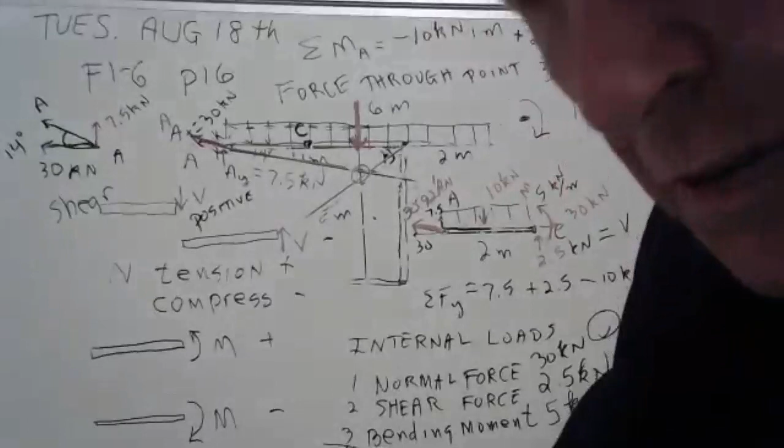Now I forgot, who am I talking to now? Samuel. Yeah, Samuel, thank you, Samuel. See, that almost went off the board, didn't it? Yeah, there's my finger there. If the bending moment is clockwise, it's considered negative.

Now, the only other internal reaction or internal load is the torque.

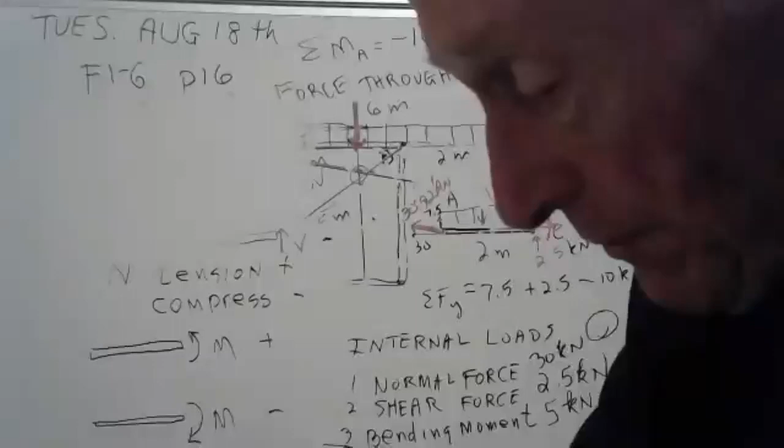But when you talk about torque, here's a member, and the torque is funny. They put a double arrowhead on it, and for equilibrium you would have to have a double arrowhead in the opposite direction for equilibrium. But torque goes the way of a right-hand screw. If you have a right-hand screw, I don't know if you can see this.

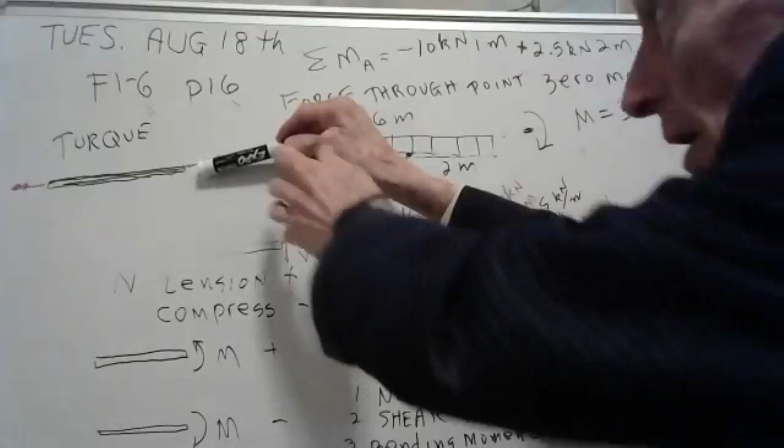What I'm going to do is turn this. I'm going to pretend this is a screw or a bolt, and I'm going to turn it. Now if I turn it this way, it backs off and moves to the right. I don't know if you guys can see that. It's going to the right. Now if I turn it this way, it'll go the other way. It goes the way of a right-hand screw.

So this going this way is positive, positive in the X direction. You always look at what's going on to the left-hand member. I shouldn't have even drawn that for you, you'll get confused. So you have to think about, if you had a screwdriver and a screw, which way would it go if you turned that screw?

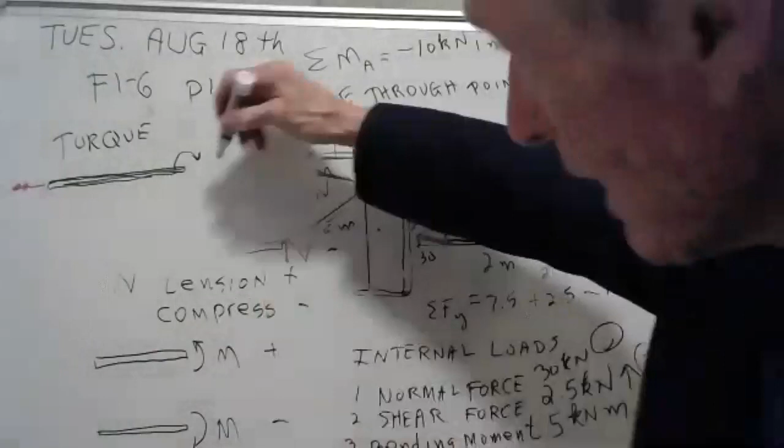The book has a different way of writing it. I think they use kind of a circular deal like that. I prefer drawing the double arrowhead. That would be a clockwise turning, and a right-hand screw would screw in. See, that would be negative because it's in the negative X direction.

Samuel, did that help any? Yes, it did, thanks. Say that again? Yes, it did, thanks. Oh good, excellent.

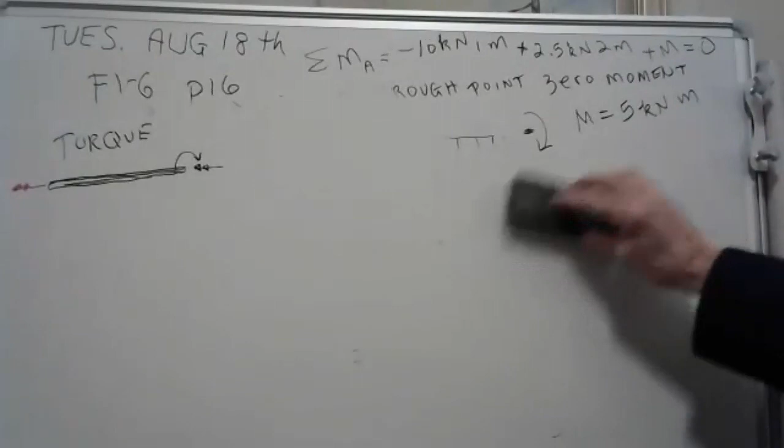Good, well we have 3 minutes, and the last thing we're going to talk about, I already wrote it on the board, but you're going to read your chapter, do your homework. But this whole course, where it's at is stress.

And there's two kinds. There's normal stress, and the symbol for that is a little Greek letter, a small lowercase sigma, and it's your normal force over area. And shear stress.

And it's stress that causes problems. That's the focus of this course. The symbol they use is a little Greek lowercase tau. This is a little Greek lowercase sigma. Now the capital sigma looks like that, and the capital tau looks like that. But shear stress is your shear force over your area.

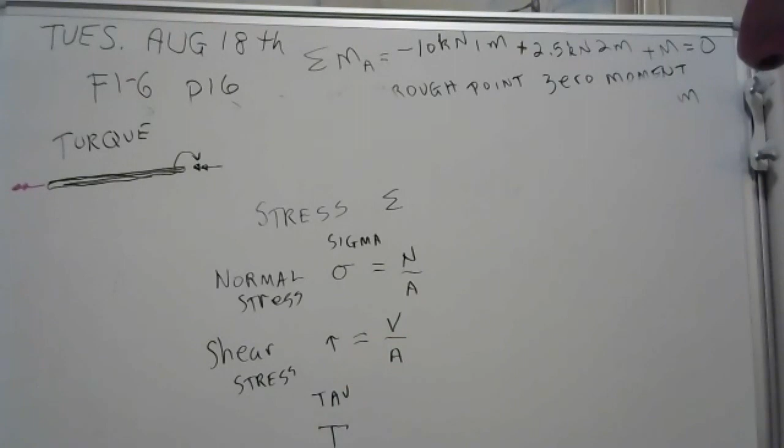That's what we want. And what you need to know is these things are internal. Normal force, shear force, they're internal. Now later when we study, how are we doing on time? Oh, I have 2 minutes left.

Later when we study the other chapters, we'll run into an equation like this, and we'll run into an equation like this. Now this is normal stress, and this is shear stress, but they're with a different kind of loading. This is with torque, see, torque is an internal loading. And we'll study this, that has a name, it's called the torsion formula. And this has a name, it's called the flexure formula.

This is bending moment. Hey, we just figured out a bending moment a little while ago. I forget what it was. Was it 5 Newton meters or kilonewton meters? 5, or was it 25? I don't remember.

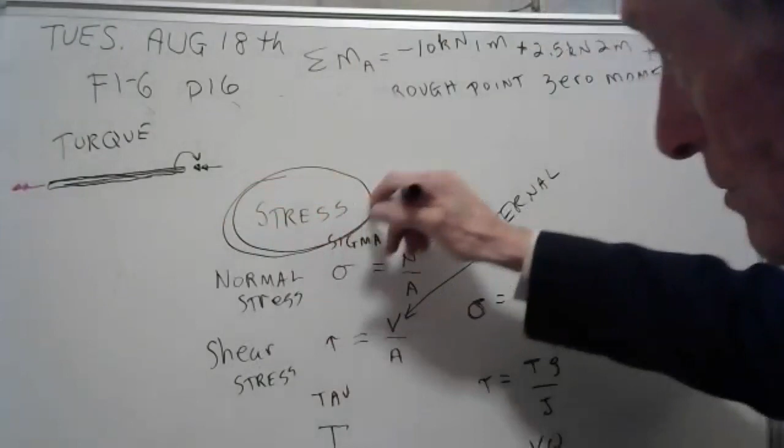Because stress causes problems. It causes problems with people. People can have too much stress and you can get a heart attack or a stroke. All kinds of bad things can happen if you have too much stress. Stress can break people, and stress will break structures. We don't want to design a structure that's broken because the stress was too much. That's what causes fracture, it's the stress being too much.

And how do you get at stress? Well, you have to find the internal loadings. There are 4 kinds, and I forgot which wonderful student rattled them off. He forgot torque. But one of my students did so well, he rattled off 3 of them. There's the normal force, there's... time is up.